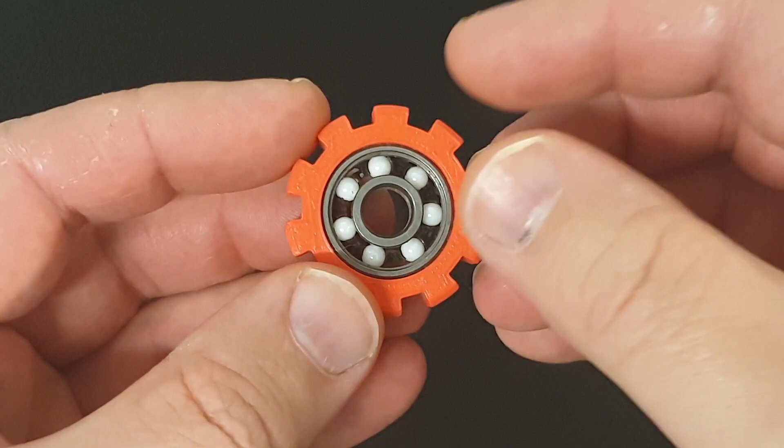How good is that? Anyway, here's the little ring spinner we're going to draw up in Onshape and print it out. Look at it go. Beautiful thing. Perfect tool for when you're locked in your room in isolation.

And feel free to pause it on those beautiful hands too. How perfect are they? Moisturized, just beautiful. Look at those fingernails. How good are they?

Anyway, on with Onshape. Okay, on we go. We are going to open up Onshape. So open up my browser, Onshape, and I'm going to try to not waffle on too much. Okay, so we'll get into more detail the further along we go. Sign in. Takes a little while. Don't forget Onshape is all working on the server. So there's not a great deal happening on your Chromebook, and I'm on a student Chromebook.

Okay, here we go. It's like Google Drive. I've got a bunch of files that I've made or people have shared with me, so it's all built around collaboration. Making things together, which is how big projects go together these days. I've got a few things from students. I'll hide names. I'm going to create a new document. Give it a name. We're working on the Ring Spinner 2020. Hit enter.

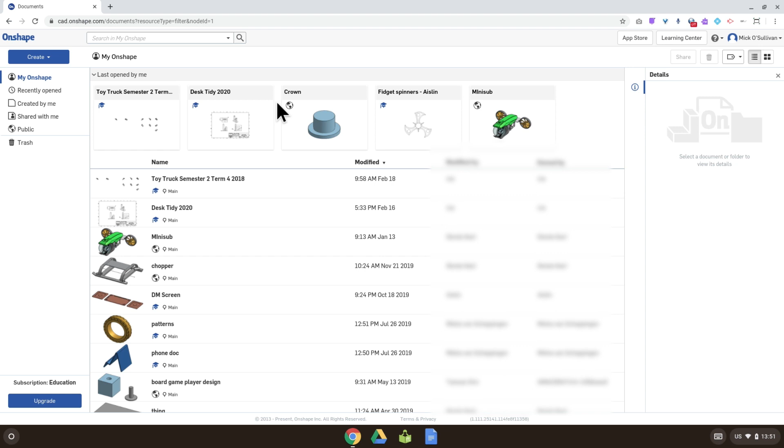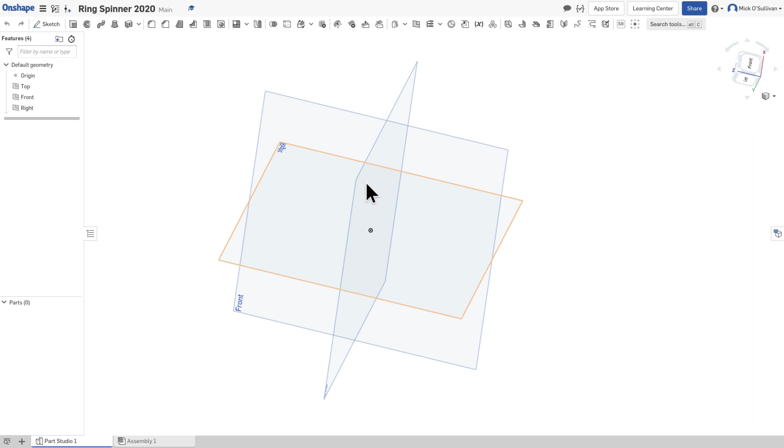Takes a little while to create the folder, so I won't go too much over the interface. What I will do though is make it full screen so we can see as much as we can. First of all, it's very similar to every other CAD package out there, even SketchUp that we've been using. If I hold down the right button, I orbit. If I roll the wheel, I zoom. If I hold the wheel, the scroll button, the middle button, I can pan. So I'm holding it down, rolling it, right button, left button is just to select.

Over here this little dice cube, I can use the arrows and rotate around, pick a face, whatever I want to do. And over here I've got some predefined views. Now these are called the planes, there are 3 of them to start with. You can make lots more and you use them to lay out your drawing in 3D. If they're not there, which would be strange if it's the first time you've used it, but if you've been playing around in it and they've disappeared, the shortcut is P to hide and show the planes. They're not in the final drawing when we go to 3D print, they're just there as a reference to help you get it where you want it to go.

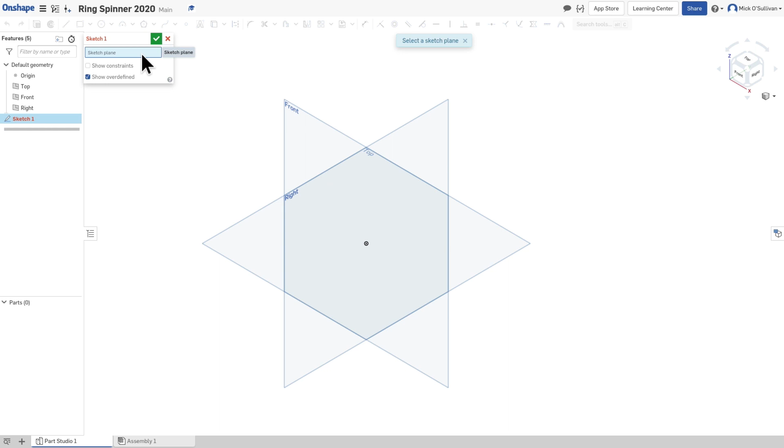Okay, let's start with the ring spinner. It's laid out very much as you would use it. They try to make these things very user friendly. So we always start with the sketch. I'm going to start with a sketch, and it'll ask what we want to use as our sketch plane. Which of these surfaces do we want to draw on? Well, I want to draw on the top. I can move because you're always moving around, and then I could pick it, or I could probably even pick it over here, but I'll pick top there.

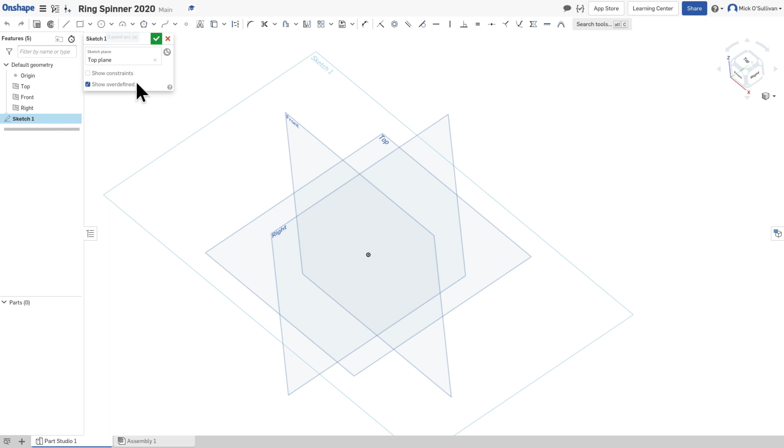It's called sketch 1. I could rename it. If it was a very complex drawing and I had lots of different sketches, I'd probably want to rename everything so I knew exactly what I was working on. Now a lot of students over the years get straight off that, and then where's it gone? Well, watch what happens. If I double click on it, I'm back into that sketch. All the icons across here have changed. They're sketch mode icons: lines and circles and rectangles. If I get out of sketch mode, I've got a bunch of different tools. So make sure you're in the sketch mode.

I don't want to draw like that though, so I'm going to right click and view normal to sketch plane. I could also use this up here and click on top. And I'm still in sketch. I'm going to start drawing. The ring spinner is the circle, the bearing. First of all we're going to start from the inside and work our way out. The bearing we're going to use is a standard scooter bearing, 22 mil outside diameter.

8 mil inside diameter, and they're 7 mil thick. So let's start with the circle. There's a couple of different circles we could use, but I'm just going to use a standard circle. Now, when I hover over here, it gives me the name of the tool and the shortcut, and if I leave it there, it'll give me how to use it.

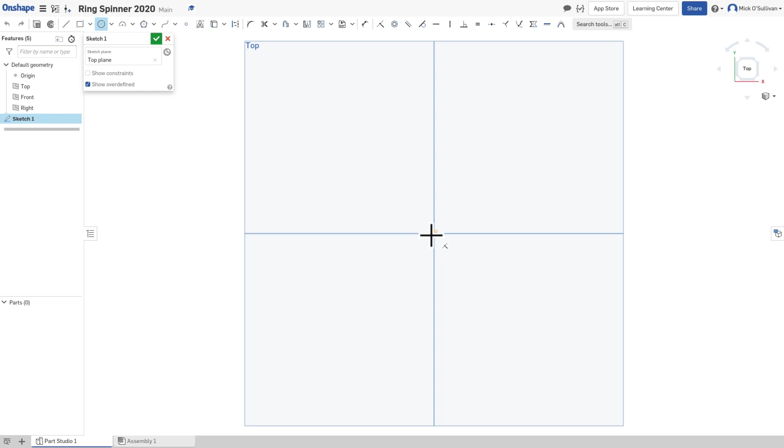So it's active now. If I press C, it turns it off. C turns it on, and I can also click on the icon. So it's on at the moment. I'm going to click on the origin and draw it. Now, I know something I need to tell you, so I'll just draw it anyway. I won't try to get to 22 mil because I'm going to dimension it later, so I'll just get really big like that. Now, it came up with 79. I'm going to type it in, but I forgot to tell you something.

If you haven't used Onshape before, I'm just going to go over here. Where the name is that you made, you need to change your account. The default settings for the measurements on this are American, and they're in feet and inches. So I want you to come along here. Happy for you to look at any of this.

This is where you could change your name if you made one of those terrible names that you're embarrassed by, like Justin Bieber or Barnaby Joyce or something like that.

It sounds terrible. Anyway, go to your preferences, change your unit length to millimeters, and save it. Feel free to have a look at everything else in here. Mass units, angles, radians if you go on to do engineering. There's a lot to this software. It's very powerful software. Okay, but all I want you to change is I want to make sure you're in millimeters and save. Now I'm going to go back to document.

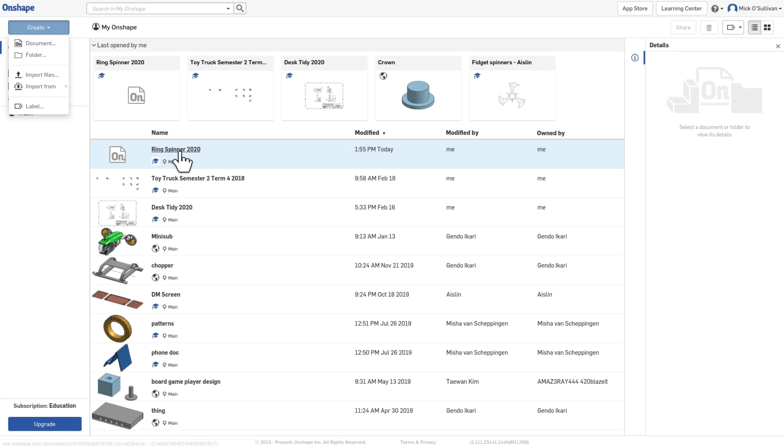That will mean for a lot of you that started your drawing, it started in inches. So you could type in millimeters every time you type a dimension, or the easiest way would be just to go back to Onshape, into your folder, and create a new drawing. If you've done it correctly, every drawing you make from now on will be in millimeters. Okay? I'd rather you do that. So it knows now that I've told it the default is millimeters, that every time I type in a number, it's going to be millimeters.

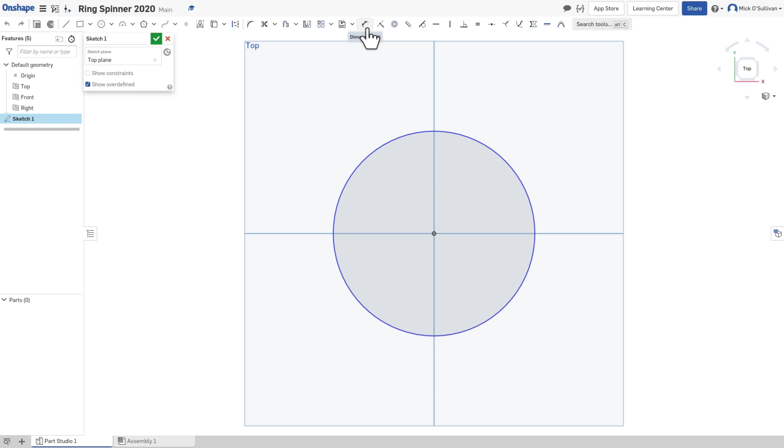I want to get back to my sketch. Right click, view normal. I know that it was bigger than what I wanted it to be. So I have to change the dimensions, and this is more like normal, well, the majority of CAD packages are like this. If you've been using SketchUp, it's a little different, okay?

So I'm going to click on dimension. The shortcut is D. I could have pressed D. I could go from the inside out and get a radius, or just go on the outside, click once, drag it out, and change it. 22 millimeters. Done.

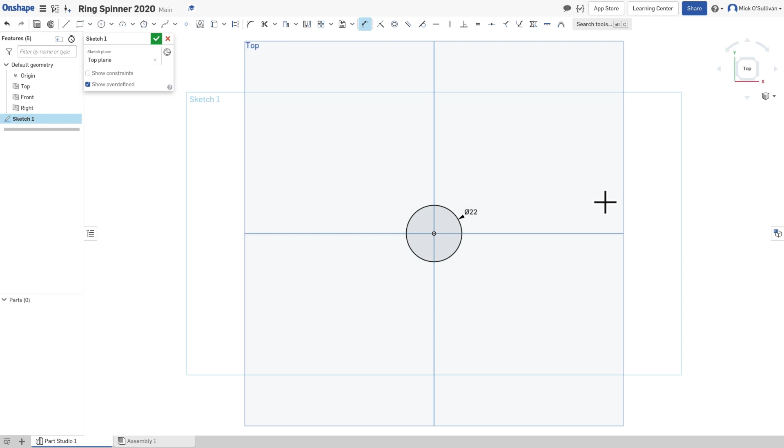Now over here, if you remember what it looked like, it'll have plastic around the outside, about 3 millimeters away, and then it's got a little nub for your finger. We could draw another circle like this, and we could make it whatever that is, +3 +3. There's your algebra. However, if for some reason the bearing changed size, it's harder to adjust. What we want to do is work like a designer, think like a designer, think like someone who uses this software to come up with new ideas.

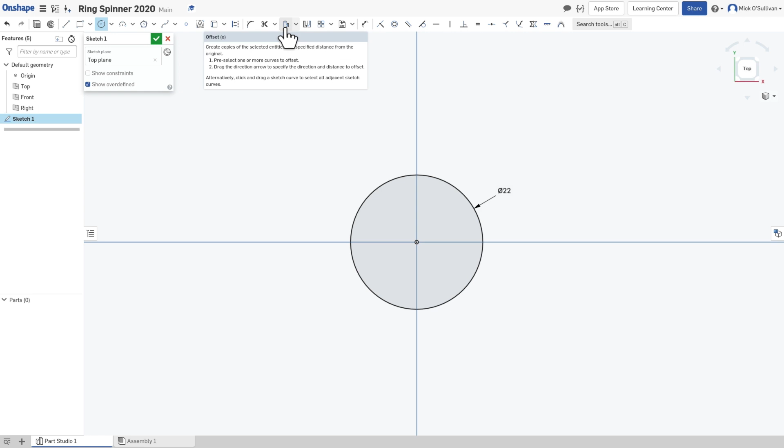So we're going to use a standard tool called the offset tool. I know that the shortcut will be O because that makes sense. There's a bunch of options down here. I don't usually look at them. Slot, offset. We're just going to use the standard offset, and I'm going to click on what I want to offset, and it's going to do a line. The default's 5 mil. I'm going to click on the 5 and change it to 3.

If I change it to a minus number, or I could have changed the arrow, I'll do another one in a minute, it would have brought it on the inside. Okay, so I've got a 3 mil offset. That means if the bearing that came in next week, or I order bearings and I can't get 22 mil, maybe I have to get 19, and I change it, it'll change everything perfectly. If that had been another circle, it would have meant the plastic was thicker.

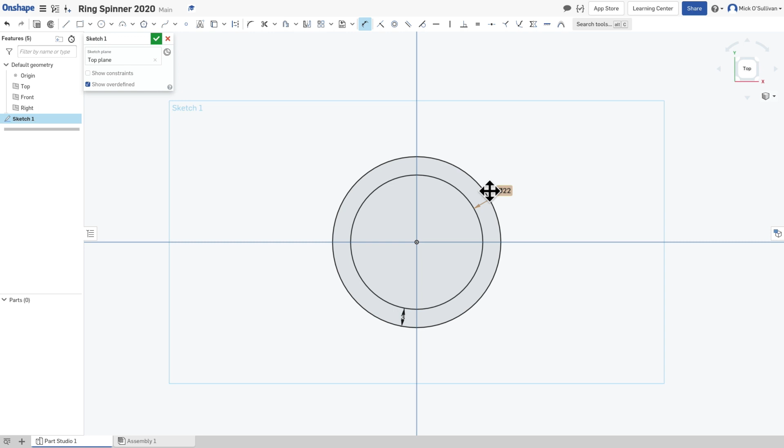What this will mean is, I haven't printed these out on our new printers yet. If there's a slight discrepancy in what we draw and what comes out, if I get them out of the printer and they're a tight fit, maybe we could increase the diameter by 0.2 of a millimeter. Anyway, I want to do another offset off the offset, and I want to make that 3 as well. So double click on the 5, make that 3.

Remember, because I'm recording this, you can go back and watch a step again. You could slow it down, you could speed it up, you could skip a bit. So that's the idea of flipped learning, okay? You can watch this whenever you feel like you can. Some people may watch it 10 times, some people may watch it once, some people may fast forward through it, watch it really quick and get it. But if it's recorded, you can go back. You don't have to ask a question.

Well, I guess you could email me.

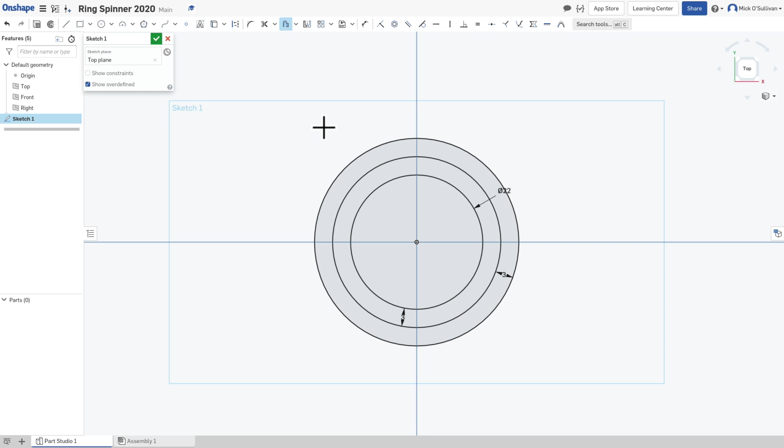Now I want to do a line up here, and then I'm going to do the little piece at the top there. So I'm going to do a special kind of line. I'm going to pick line, and then I'm going to change it with this one. I think the shortcut is Q, construction line. And that's like drawing a light line before you draw your final drawing.

So I'm going to go to the origin. See how the icon changes? If I'm up here, it's on the line. If I'm down here, it's where it intersects, okay? I'm going to hold down the left button, bring it up here, just like that, just above the circle. And the line looks different. It's a construction line.

Let's have a look if I can change it. So with that picked, I could change it to a normal line. So if you accidentally draw a normal line, like that, I want you to change it to construction line. I can change any of these to construction line. You can see when I hover over them, it actually shows me the offset icon up here. It shows me it's an offset, so I know when I'm doing my design. And you can see that's been offset, and it's got 2 lines related to it that are offset.

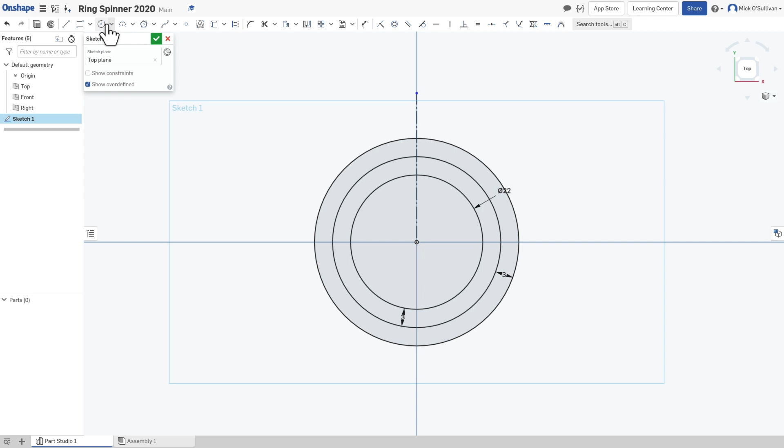Okay. I want to do the little nubbly bits for your fingers. So I'm going to drag from the origin out here with a normal line. About there. And let go. Now I want to give that a size. So I'm going to go back to my dimensions, and this time it's going to give me an angle. I'm going to click once there. That's giving me the length, but if I click on here, it knows it's got to change to an angle. That's a very precise angle. I'm going to make it 7 degrees.

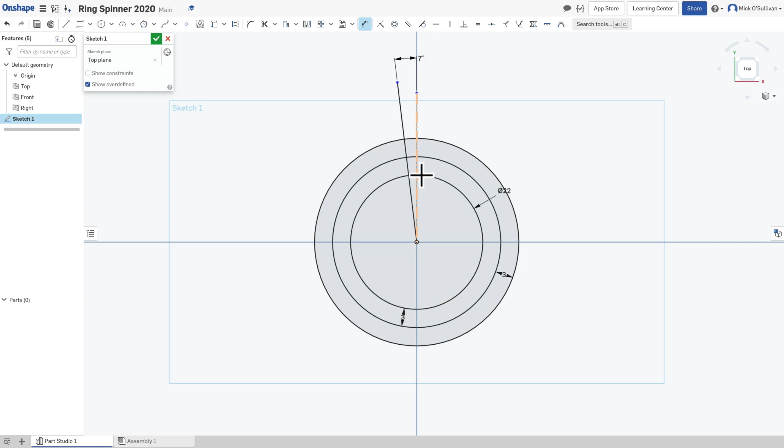Now I want to have another line here which is exactly the same. Like I could have done with the circle, I could draw a line and dimension it and change it, and then I'd have to change this one and that one. So I want to use a special feature called mirror. Sometimes it's called symmetry. When I click on it, it says select a mirror line. What do I want to mirror about? This construction line I did. What do I want to mirror?

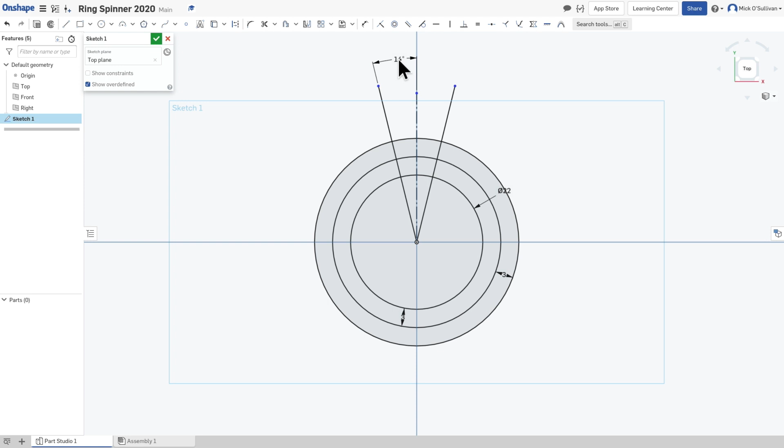That one. So now if I go back to dimensions, which is D, double click on here. If I change that to say 14, they both change, okay? So I can come up with some really interesting patterns and designs doing this, and faster than normal.

Now I don't really need to do anything, but just to show you, I can trim these lines too. So I'll get the scissor tool. SketchUp had a little eraser. This has a little scissor, and it'll trim between where things intersect. See that? Might get rid of these lines. I could even get rid of these, but that might cause me problems if I need to change something. I'll leave them.

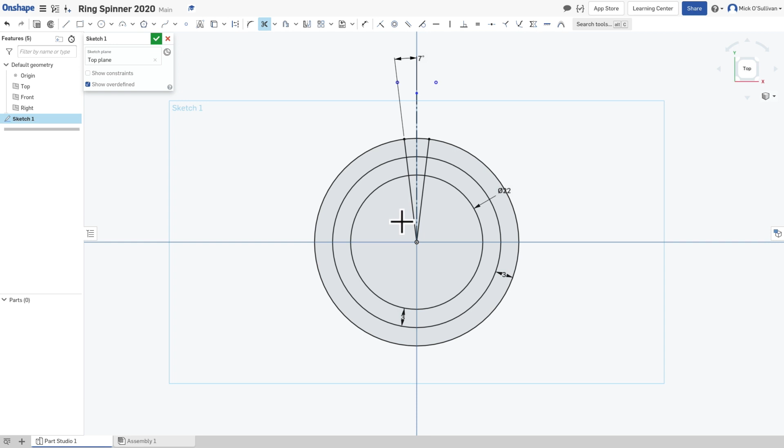And I'm happy with that sketch. Oh, you know what I will delete? I'll delete this one. Okay. Looks like a diamond ring. Don't forget, it's just a 2-dimensional flat sketch. I'm going to tick. And my sketch is there. All my tools have changed again.

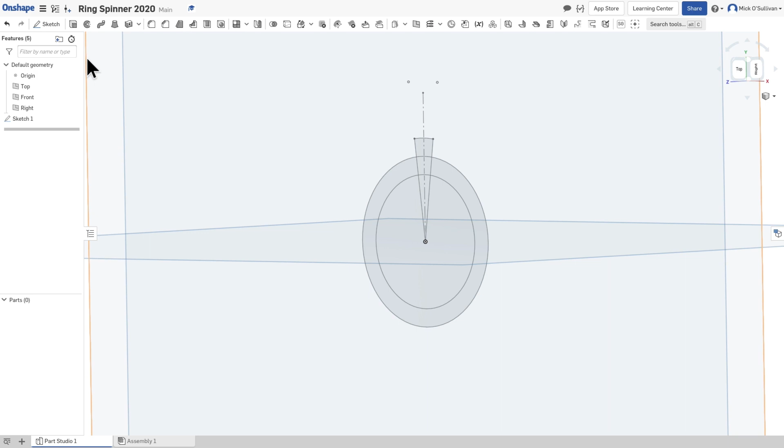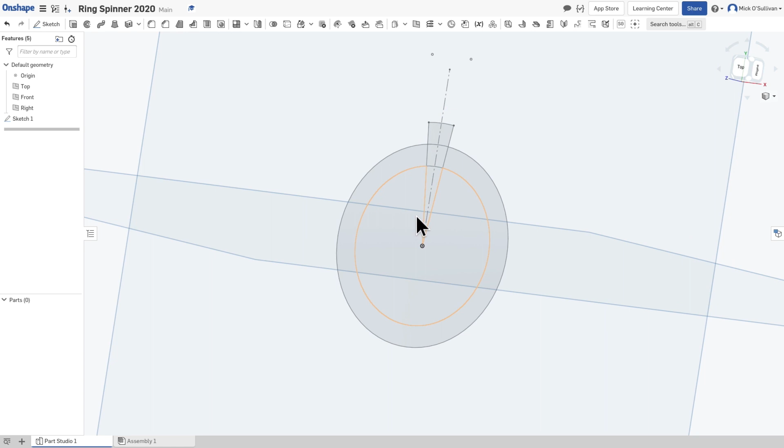They look at how people use this software and what people need to do, and the tools get more useful and a little more specific as we go along. There's some math stuff here, sheet metal there. So they've tried to lay it out in a sensible way. They want you to be able to use it because they make a lot of money from this. It's their business. Okay, so sketch done, ready to go.

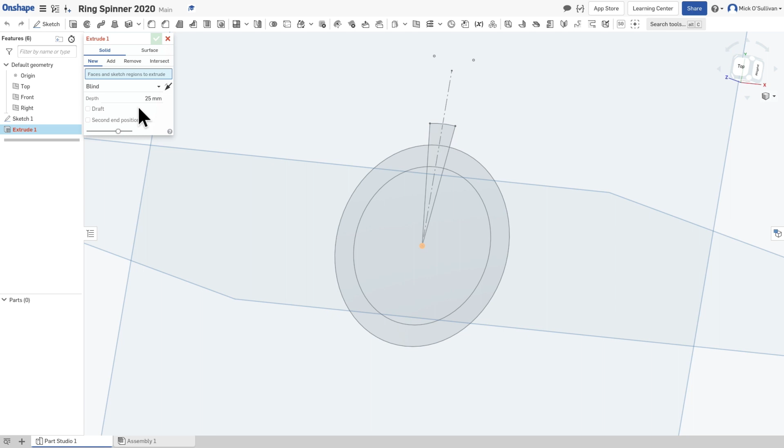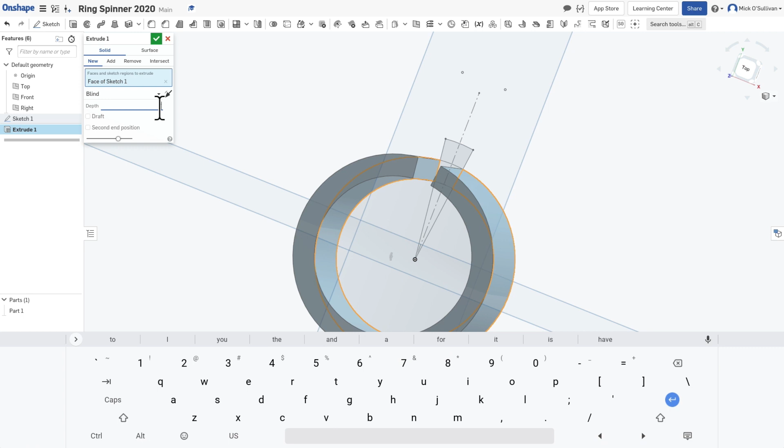I'm going to add an extrusion, a feature. It tells me a bit more about how I do it. It's pretty simple. What do I want to extrude? So I'm squeezing toothpaste out, just a continual shape. I won't change anything to start with, and I'll click on it. It's got a ring like that, like a curtain rod. The default is 25mm, but we know our bearing is 7mm. So I'm going to make it 7.

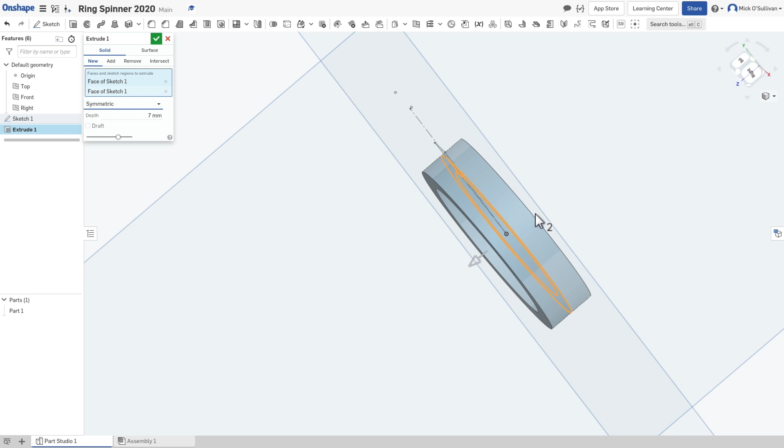And I'm going to do a couple of little things now. I want this part of the sketch as well, so I click on it. So fully around. I want to change this blind to symmetric. What it does is it projects out from both sides of the sketch. That'll be useful for me. And I'm going to tick that. Now I might give this a name because I'm going to have 2 extrudes, and this will be called bearing ring.

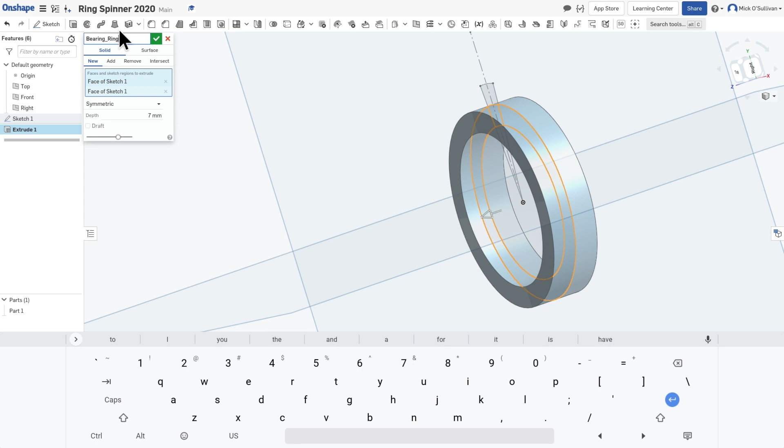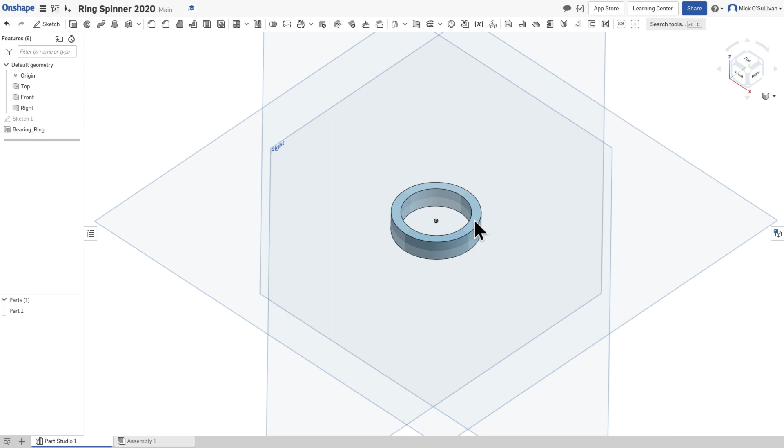Tick. Okay. Do not fear, your sketch has disappeared. What it's done is it's hidden it. It wants to make it clean and easy for us to understand what's going on. So it's hidden the sketch, like that. I might look top down, hey? Okay, there we go.

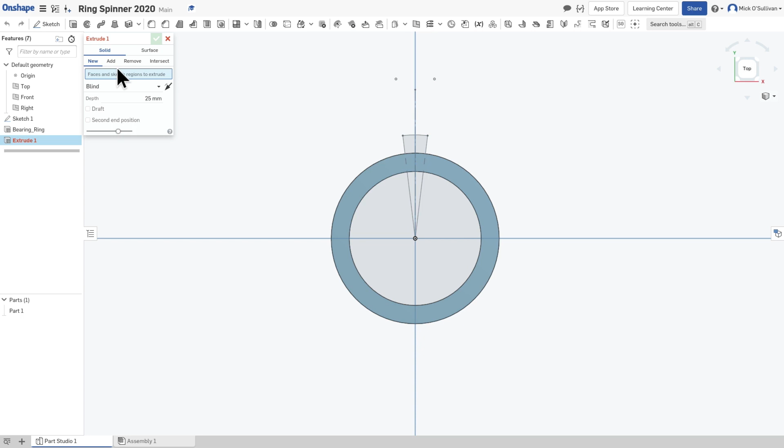Just for you, I'm going to click on the little eye and show the sketch again. I want this bit now, and I'll do another extrude. What do I want to extrude? This time I'm going to change a few things. Oh no, I'm just going to extrude this one. I'll do it the same. So change it to 7mm.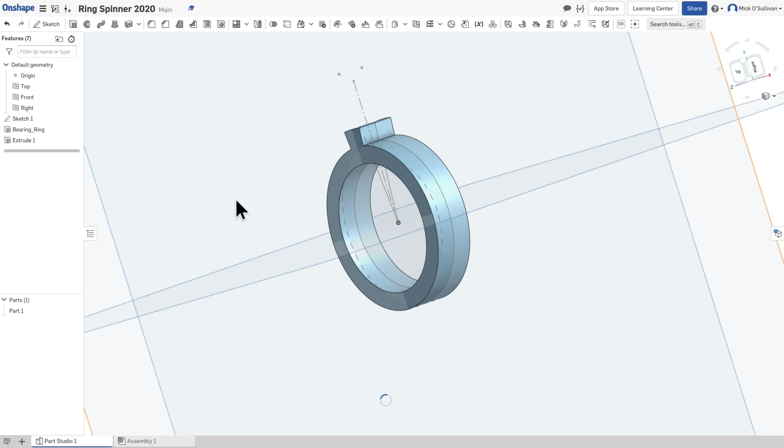And I might do it symmetric. So there we go, it's around there. Looking more and more like a diamond ring all the time. Now over here I can move these, and we might do that in a little bit. I can drag them up and down the order they're going, so that every time the computer does this, it's doing it in this order as it comes down here. That could come in handy.

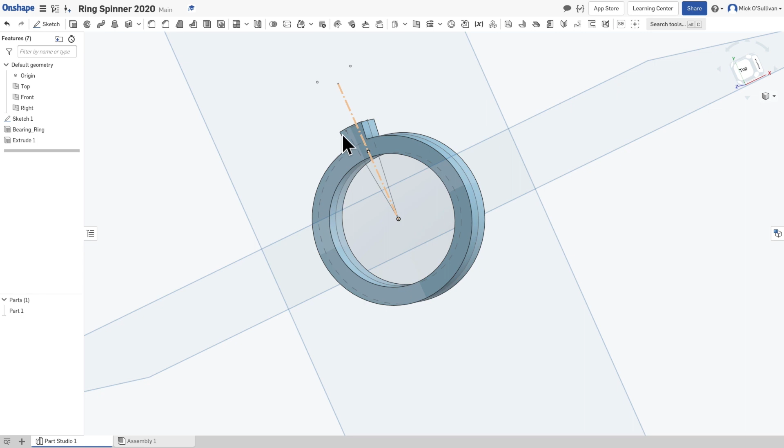But as you remember, mine had 10 of these around the outside. If I was to go back to the sketch and make the 10 here and then adjust them all, I mean, I could. It's not a bad way to do it. But I'm going to do something else. I'm going to do what's called a pattern, an array, and the icon looks like 4 little blocks, like some Minecrafty thing. But that's a linear one, a straight line. I want to make a circular pattern, to go around a circle. So I'm going to press the little arrow next to it and go circular pattern.

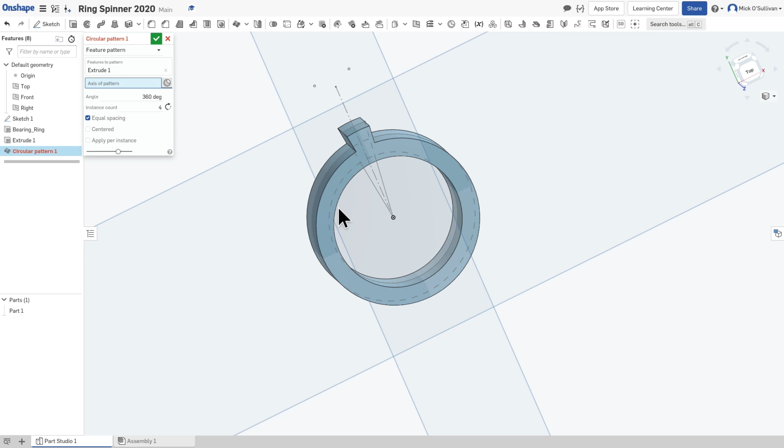And this is where I need to change a few things. I might change it from part, because the whole thing is a part, you can see down there it says part, and change it to feature. Now when it's on a feature, I want to pick the feature. I'll pick it along here. I didn't give it a name, but I know that it's not the bearing ring, it's the extrude one. And then it comes here to axis. What axis do I want? I'm going to click the little mate connector and zoom in here so I get right on that dead center.

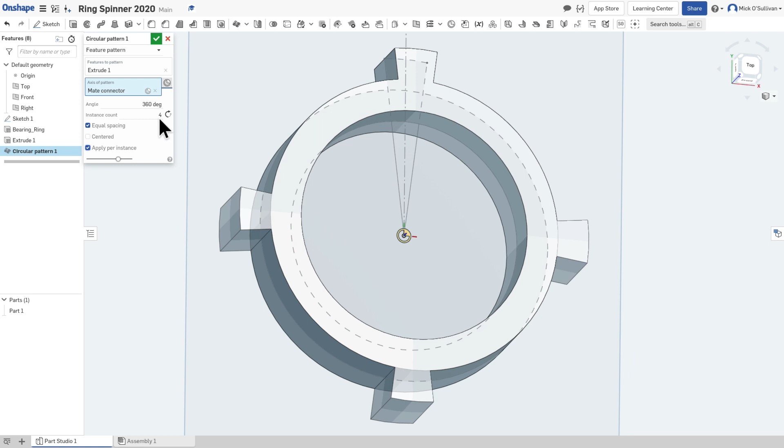Now it's red. Red's never good. Let's have a look what we need to do. It is probably this apply per instance, and we'll talk about that as we go. That's better. So the default is 4. Let's change that. My one that I'm making is 10. But you are the designer. So perhaps we want to go 14 today. That looks pretty cool. 14. You play around with that number, find something you're happy with. Obviously, the more you make, eventually it's going to just join up as one big ring. That doesn't seem as much fun.

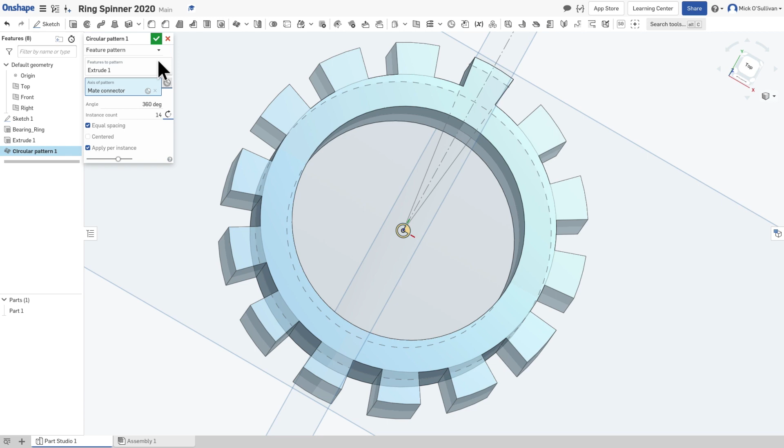Okay, happy with that. Now I've got one more little thing before I chuck it on the 3D printer, and that's to put a little, I'll zoom in and show you top, a little dip in there for my finger, okay? So I'm going to draw another sketch, but not on one of those 3 planes. I'm going to draw it on a face. I could probably draw it on any of these faces, but then if I make some changes, things might get a bit odd.

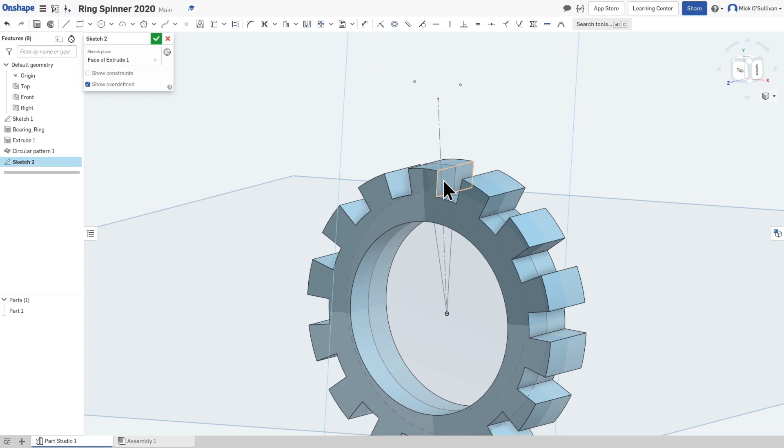Sketch. This is where I'm going to work on this face here. Zoom in. And I'm going to use my line tool. Now see when I go around with the line tool how it locks into midpoints, and I come down here, it'll lock into intersections. Midpoint there, see that? Intersection there. So I'm going to go off the intersection, bring it down, but I don't want to bring it to that midpoint. I don't want to lock it in, I want to come up with my own. About there, but make sure it's joining the other one.

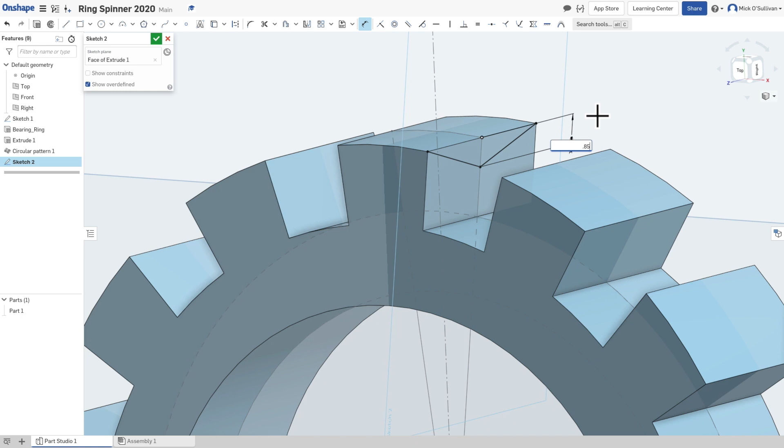Okay, something like that. And I might dimension it. I'd like to know exactly what I have there. I'm going to go from this point to that point and bring it out there. And it's 1.11. That's a terrible number. I hate those numbers. 0.85. Like that. Not too much. And tick. Now that's just the sketch. I need to add a feature to it. There's a couple of ways I could do it. I could probably rotate it around the circle and cut away instead of adding.

I might do a sweep instead, since it'll give me more options. This time I'm not going to add material, I'm going to remove it. I want this sketch here to go around this. If I did a rotate, I'd need to do it around that intersection, but if I do a sweep, I can just pick one of these circles as the sweep path. There we go. Done.

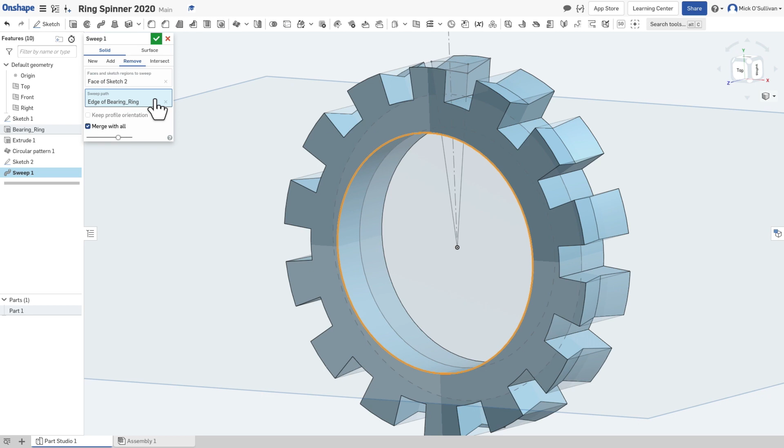Sometimes merge with all helps if it doesn't work. There we go, there's my ring spinner, ready to stick on the 3D printer.

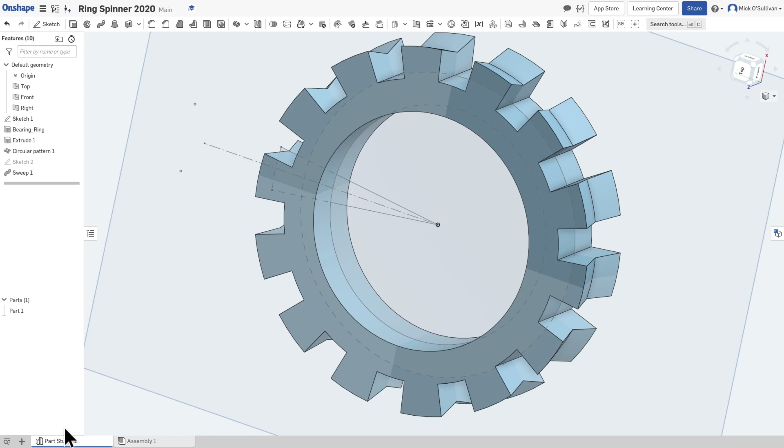Now, the default on Onshape when I start a new drawing gives me a part and an assembly. There's only one piece in this job, so we won't talk about assembly yet. But if I right click on that part tab, I have an export button. Export, Part Studio, I might call it Ring Spinner. It's giving it the name from down there, which I could also rename.

STL will be good for this. I don't bother changing any of that. Millimeters is fine, medium resolution I think will be fine for us. Download the file and store in a new tab, I'll just go straight to download I think. And if it was multiple parts, because I'm going to a 3D printer, it would be better to get individual files. So if I made an assembly with lots of little pieces joined together, I'm better to export it as individual files. That happens a lot - students download and I get one big file that is really hard to print.

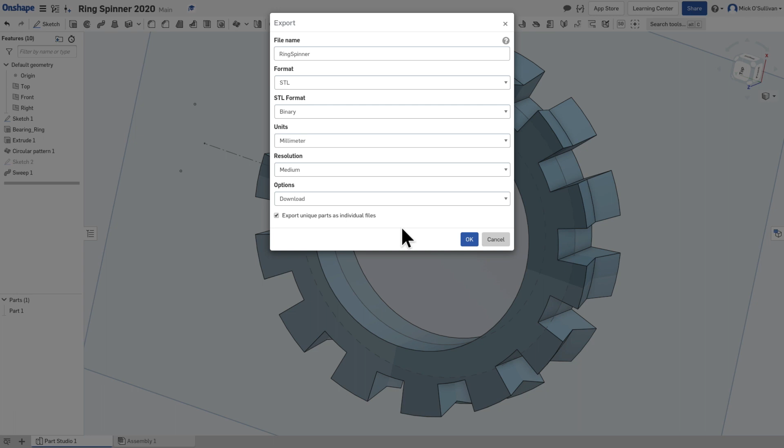Now it should automatically download. Because I'm on your Chromebook, I'll go through the process - download manager, show in folder, you'll see all my junk I should imagine. Ring spinner, there it is.

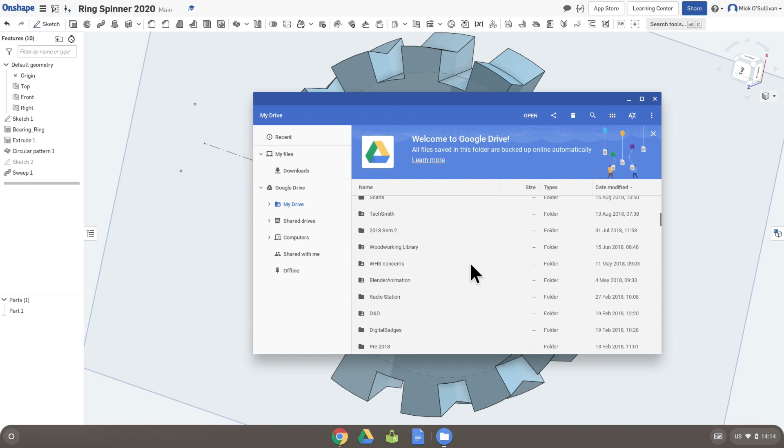Okay, I printed out the ring spinner that we drew up, and the design is fine, the printer came out very well, but the bearing is tight, so I'm going to add a little bit to it. Now I'm not going to turn the Chromebook on again because I think it's gone flat, and I've got my desktop PC all hooked up, so I'm going to do it here on Windows.

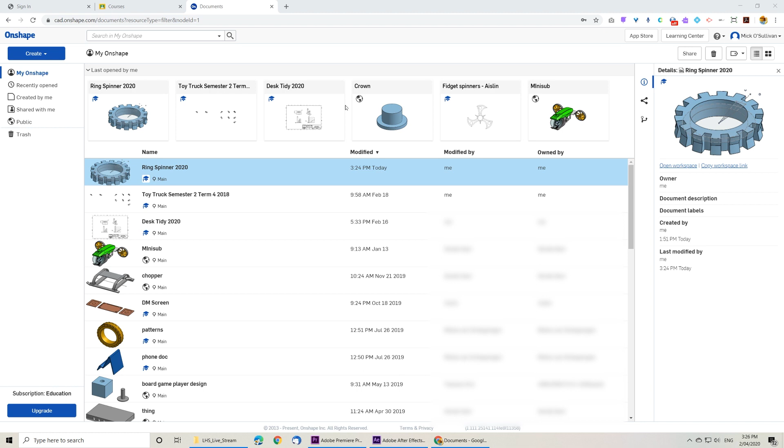So I log in, same details, I'm in the cloud. Here's the ring spinner, go into it. A couple of little things from the video I just made. First, I think I'd like to rename it, so I right click on part 1, rename, and I'll call it ring spinner.

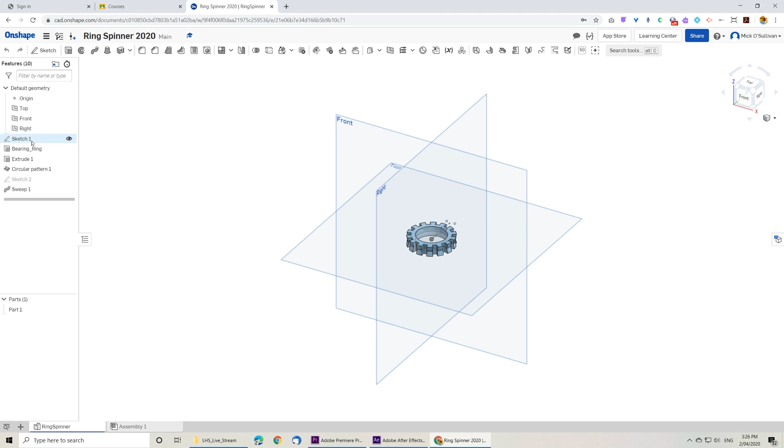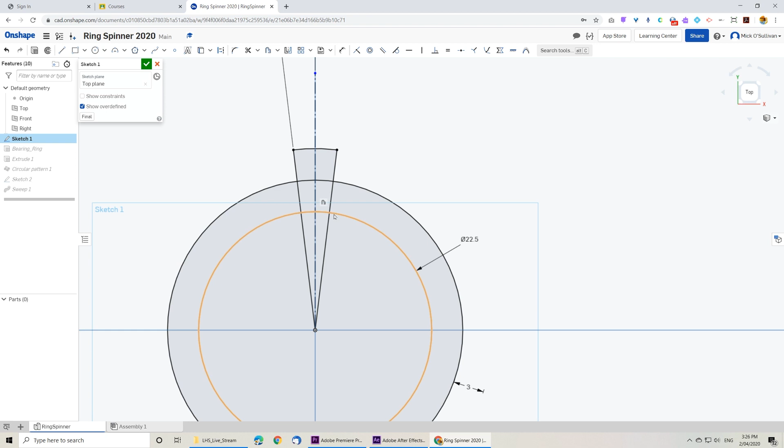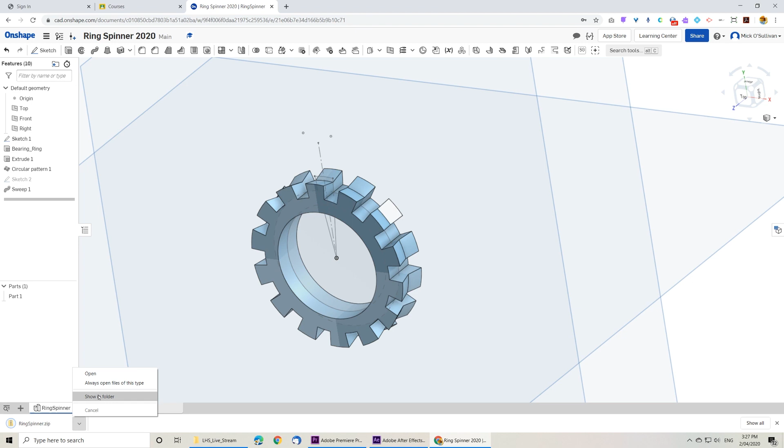Tick, there we go, everything looks fine. Right click on there, export. Now because I'm not on a Chromebook, same as what I set up on my Chromebook, the file will download to my computer. There it is, it's all zipped up, ready to go. Show in folder, open that zip folder - there's my STL, stereolithography file, 3D file. I'm going to drag that into my documents. There it is, it's unzipped in there.

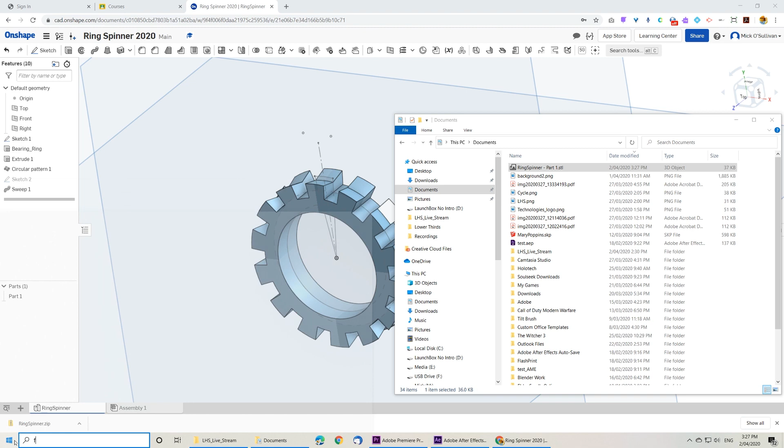I'm going to drag that now. Actually, I'll need to open Flashforge, or Flash Print. So I'll be expecting you guys, if you have a PC, to do this. If you don't, or if you can't install Flash Print, you're going to send me the STL. I'm going to drop it in there, adjust it.

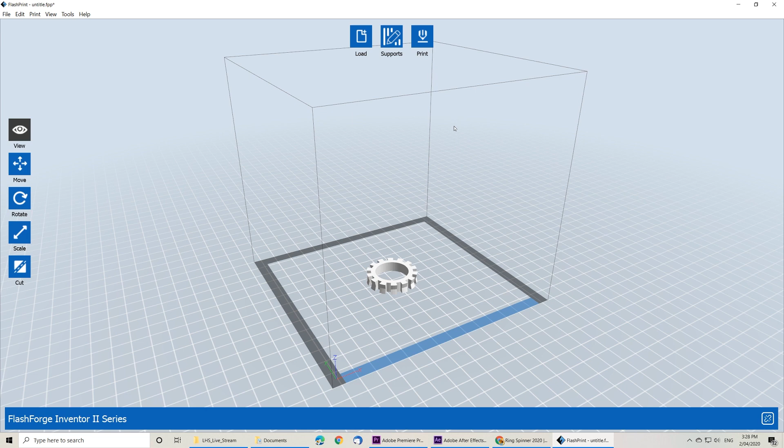Okay, I like the print, I think I'll leave it as normal. I'm going to go print, standard. It wants a part name - ring spinner part 1, that's fine.

Just turn the printer on, ready to go. It says it's going to estimate 15 minutes to take. I'm going to send G-code, that's the printer I've got. And we'll let it heat up and start printing it, and I'll set up to record the print and put it at the end of this video.

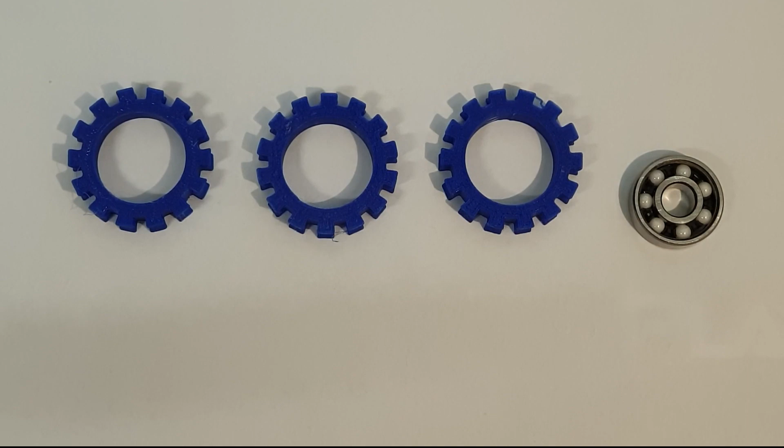Okay, final results. First one, too tight - that's 22 mil, no good. Look at those beautiful hands. Second print, 22.5 - too loose, no good. And finally, oh, hear that? 22.2 - oh, it spins, very nice. Look at that technique, beautiful hands.

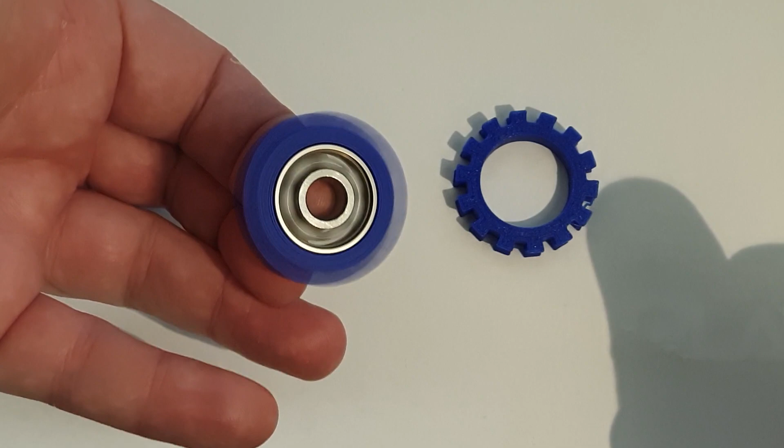And that's it, finish it up. Send me the file, share it with me on Onshape, and I'll print it out.

Do you know how long this whole thing took? Forever. Oh, any kids out there making videos - good stuff.